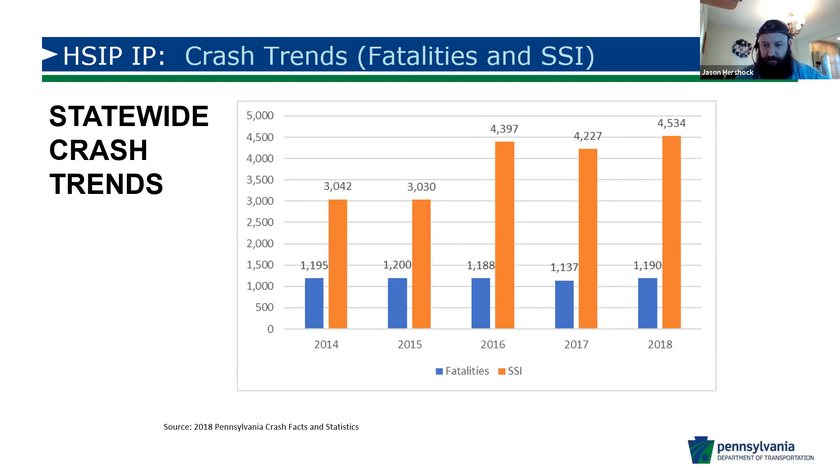Just another way to look at the data here, just looking at it by crash types and the 5-year average of numbers of crashes, you can see lane departures and crashes that are related to lane departures definitely take up a lot of these top locations. Again, looking at the serious injuries, lane departures is at the top, intersections is now number 2.

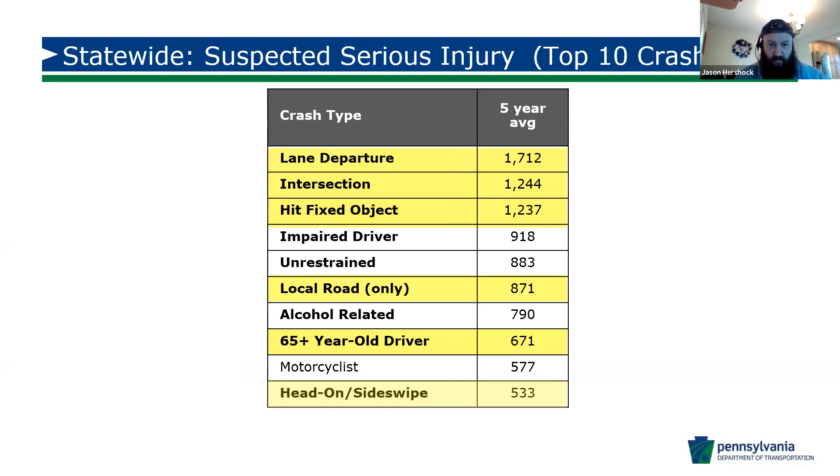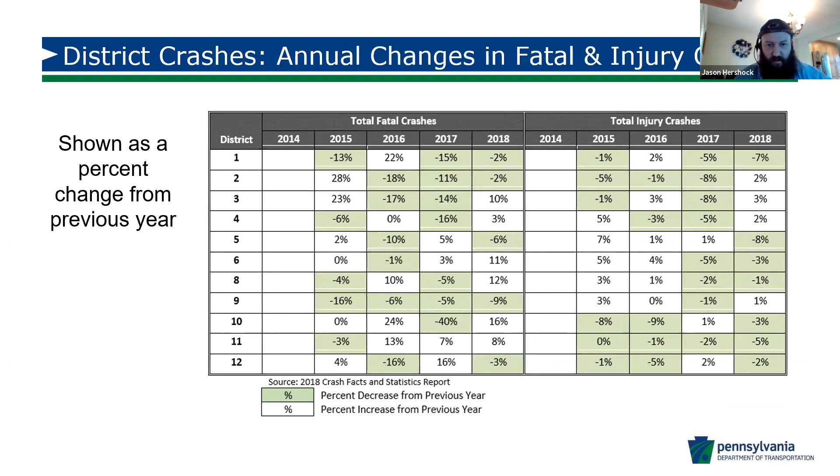Then when we go by districts, you can see this just shows the change in fatalities and total injury crashes year by year that were evaluated. So from 2014 to 2018, 2014 won't have anything because there's no percentage change. That was the first year of this evaluation. So you can see in the green where it's decreased and in the white where it's increased. So sometimes it's going up, sometimes it's going down, but mostly it's going down in most of the locations.

Again, just another slide of that. And then this just shows not the percentage, but the number of crashes that were either reduced from the previous year or the number of crashes that increased from the previous year. Again, the green is the decrease, the white is the increase.

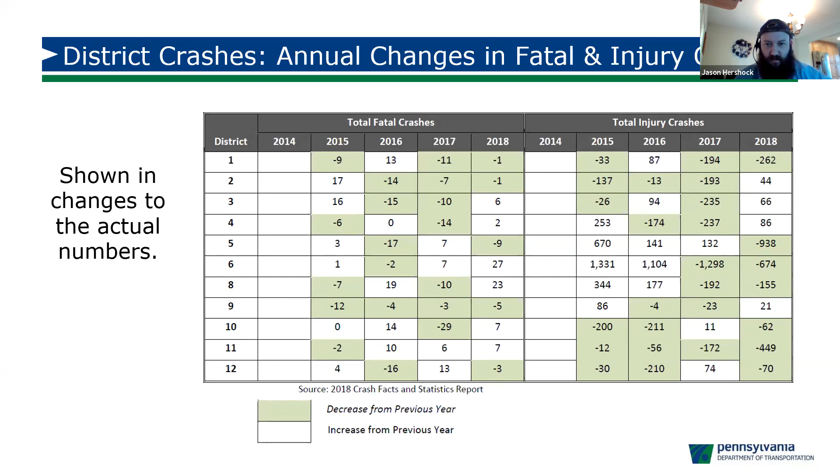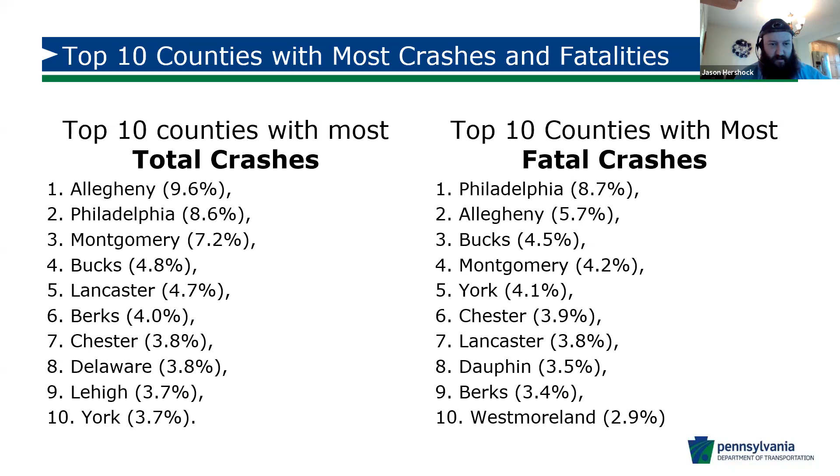And so with that, I'm going to show it by county here. Just by total crashes and total fatalities, you can see these are the counties. If we were just to go by total crashes or fatalities, I don't think anybody's surprised to see Allegheny County and Philadelphia at the top for both of these. And then the surrounding metropolitan areas, surrounding counties of those locations also being in the top. So that's what we would expect to see.

These next few slides, and I'm sorry, that one's a little bit blurry, but it'll sort of show the difference by just looking at crashes versus crash rate and how that can really skew stuff if we're a state that just bases our funding on those. So on the left side, you can see unrestrained annual frequency of fatal and suspected serious injuries. So by that, it's not surprising. We have it in the metropolitan areas, Philadelphia, Pittsburgh area. It looks like up in the Scranton area there too, down into the Harrisburg capital area.

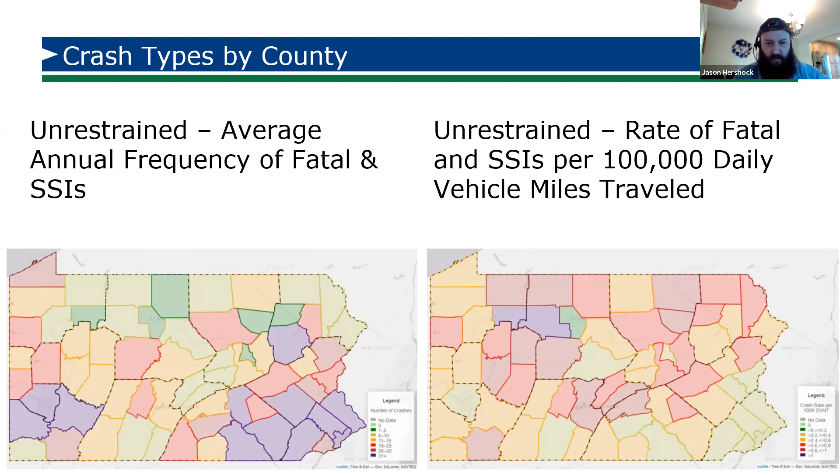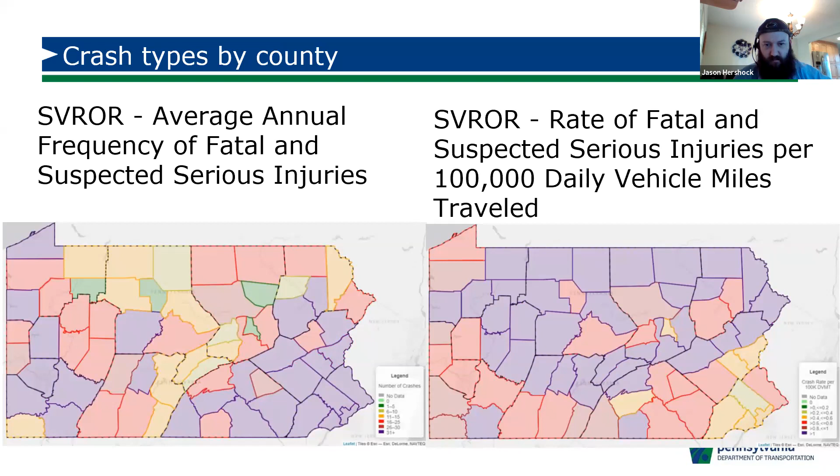But when we put that based on the 100,000 daily vehicle miles traveled, all of a sudden we see that it shifts from the major metropolitan areas to Forest and Elk counties, which are far from major metropolitan areas. So again, the data can be confusing. Which one should we use? And just to show this again, so single vehicle run off the road crashes, which one's more important? Here, the first one on the left shows metropolitan issues. On the right, it shows our rural northern tier and some of the counties in the middle of the state that are mostly rural. So again, which one do we use?

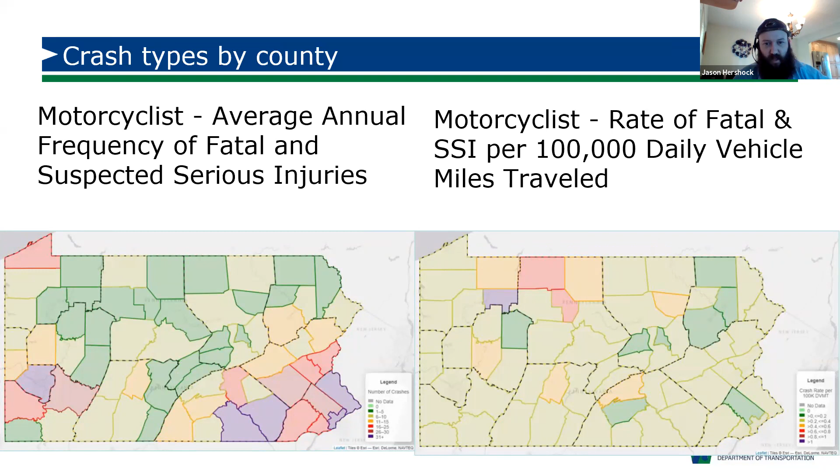Same thing again when we look at motorcyclists. When we look at just crashes, the observed crash frequency, again, metropolitan areas. But when we do it per 100,000 daily vehicle miles traveled, again, we're getting those rural northern tier counties that pop up to the top.

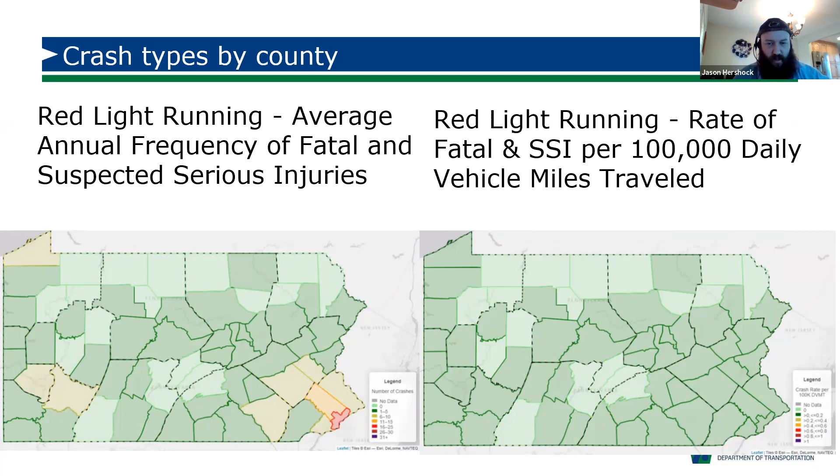And then running red light, this is one, again, I'm just showing this one because I'm going to reference intersection safety later on, but you can see it's mostly green on both of these. There is the Philadelphia area that's red and there's some reddish yellow, but when you look at it per 100,000 daily vehicle miles traveled, really not a big issue there. So just keep that one in mind.

So with seeing some of those crash trends and some of the data there, just want to go over how we spent our money. We have spot improvements where you basically just take an intersection or you take a corridor and you do safety improvements. We have the systemic safety improvements where we apply certain countermeasures to combat different types of crashes through known features of a roadway or other risk factors. Over the 2002 to 2015 timeframe, we implemented 324 projects, costing $406 million. All these were basically on state roadways.

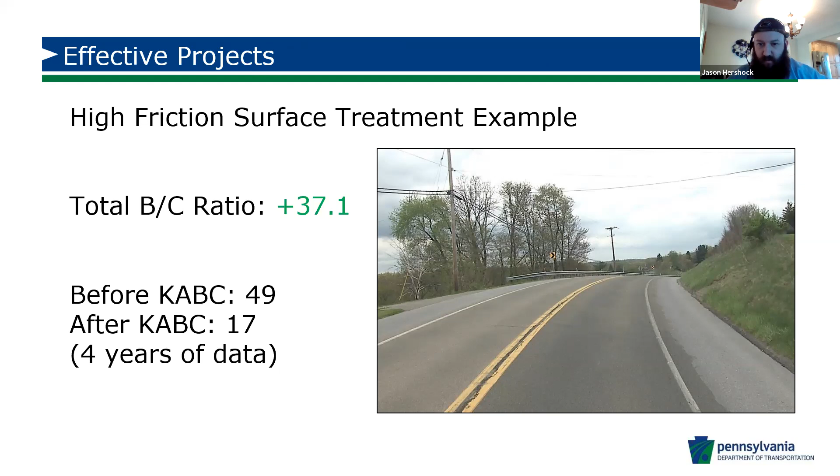So some of the specific locations here, we have an example where centerline rumble strips and edgeline rumble strips were installed. This picture here shows a district-wide safety improvement project. The data on the slide considers the high friction surface treatment portion of the work, and it was enormously successful. Every HFST site had some reduction in crashes and overall severities. The site had an existing history of curve-related and wet road crashes, thus justifying the expenditure.

This was rumble strip and centerline. Oh, I messed that one. Yeah, that previous one was, okay, there we go. This is the rumble strip one. The previous one was the high friction surface treatment. This one included various locations. So this was a systemic application of rumble strips. The BC ratio was very high for this, but there was also a 14% reduction in single vehicle run off the road and 21% reduction in head-on crashes. So you can see 73.8 total benefit cost ratio. We will take that any day.

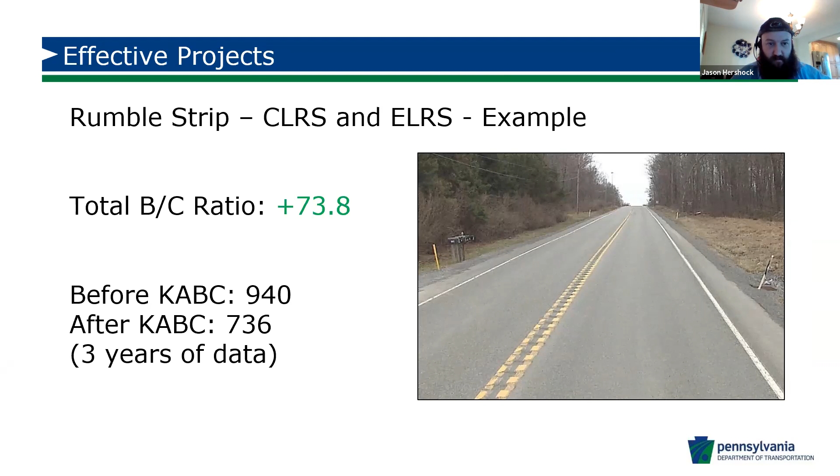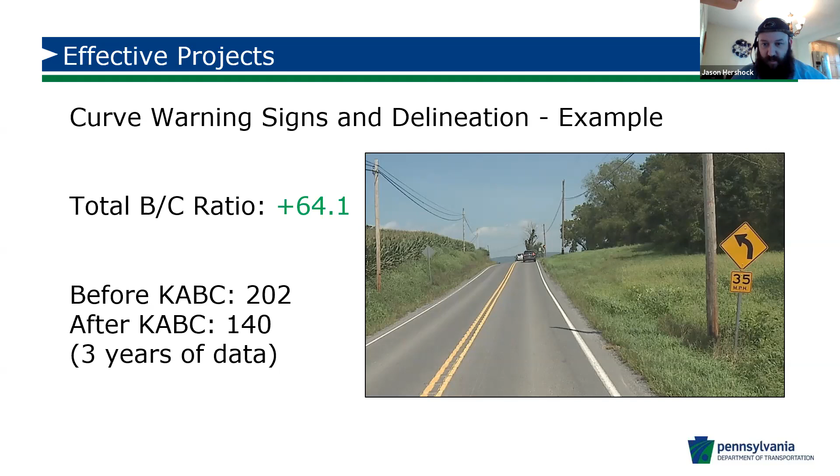This was a curve warning, so basically just identifying curves and doing basic signing and delineation. This was through what we call our roadway departure implementation plan. So again, the slide speaks for itself, very successful. And this was systemically applied at multiple locations.

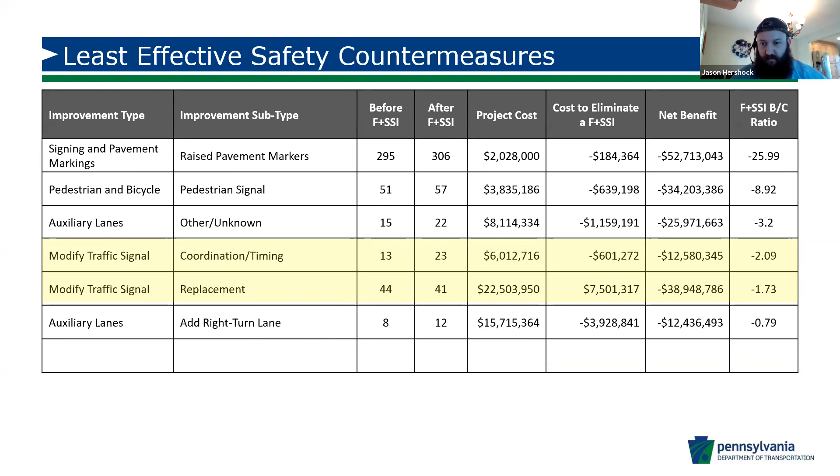So then we know what wasn't effective. Just want to point out, we spent a lot of money on traffic signals and intersection improvements. And when you look at what's the least effective, it was the traffic signal modifications, the coordination, the timing, and the replacements, netting actually negative cost benefit results. And so we definitely have done some studies after that to see what could be the cause of that.

So quickly, you can see some of these here. This is a district-wide raised pavement marker, the RPMs, not very successful at all. It was performing poorly. The extreme benefit cost ratio was due mostly to the small project and about 8 additional fatalities that occurred after this project was done.

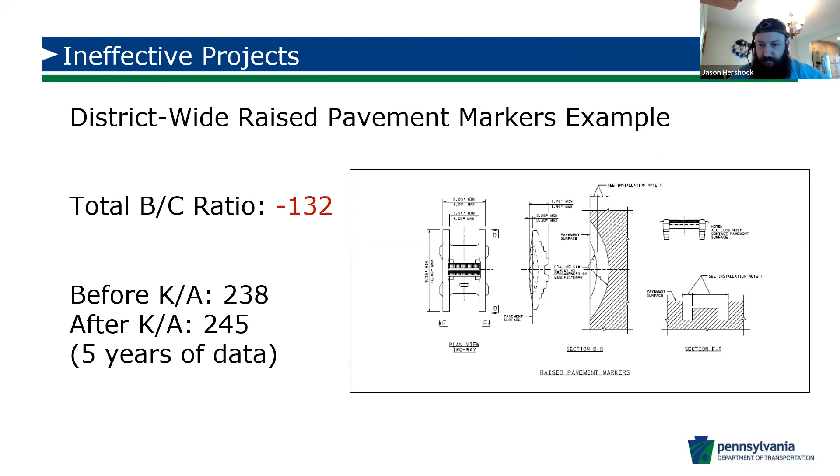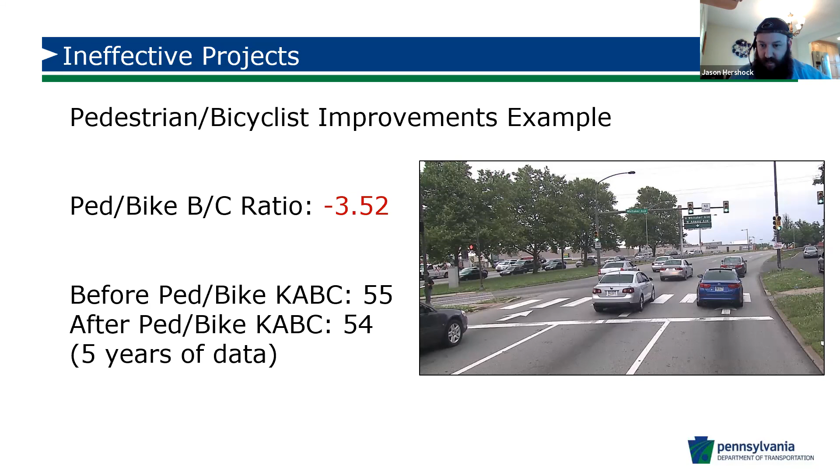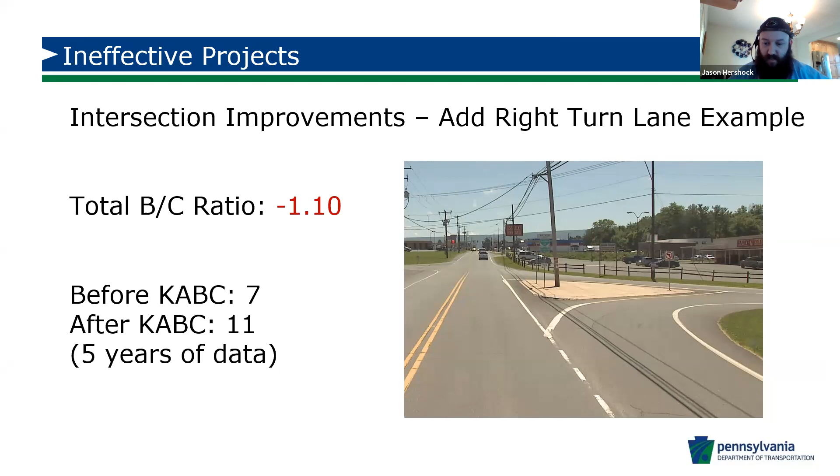In addition, while the project corridor had over 3 crashes per year, there was less than 1 intersection crash per year. So this is where that data driven comes in. Should this have even been an HSIP funded project? Probably not. Noteworthy practices, and I'll go through these pretty quickly.

Pennsylvania's already implemented many different options here, and I'll cover them individually. So HSM implementation. PennDOT continues to strive to be a leader in implementing the Highway Safety Manual. PennDOT now requires the Highway Safety Manual used in analysis for alternatives and requested for design exceptions. Provided multiple rounds of Highway Safety Manual training to headquarters and districts. PennDOT's made extensive efforts to fully localize Highway Safety Manual tools. So we have our own SPFs and everything, and we've made tools to make it as easy to use as possible.

Data analysis. We started our first network screening in 2017. We're currently in our next round of network screening, which will include a lot more factors in it. It covers all 67 counties with hundreds of locations in most of the counties. And we also have standardized the way HSIP applications come in through a SharePoint website.

Innovative countermeasures, you can see on the previous slides what works. Obviously, we've done a lot of high friction surface treatment, signing, rumble strips, basic intersection improvements. You could see the back plates, the enlarging of the lenses. Those things work, as well as some standards changing, such as safety edge.

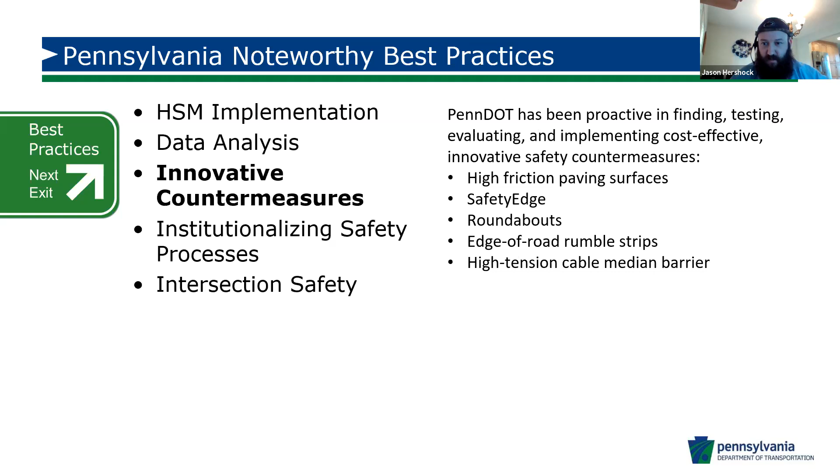We've institutionalized different safety processes by updating our Publication 638. That basically involved a big rewrite that happened over about a 3-year period, but that's been done. And many of those things are now finding their way into other manuals, as mentioned before, and resulting in pretty good positive safety benefit.

And then intersection safety was also another one. PennDOT's implemented many intersection safety countermeasures at thousands of intersections, ranging from bracketed stop signs with advanced warnings to converting intersections to roundabouts. And also, we mentioned the ICE policy, and Mark, who's going to speak after me, has extensive knowledge of many states who have implemented ICE policies and have reaped the rewards of those.

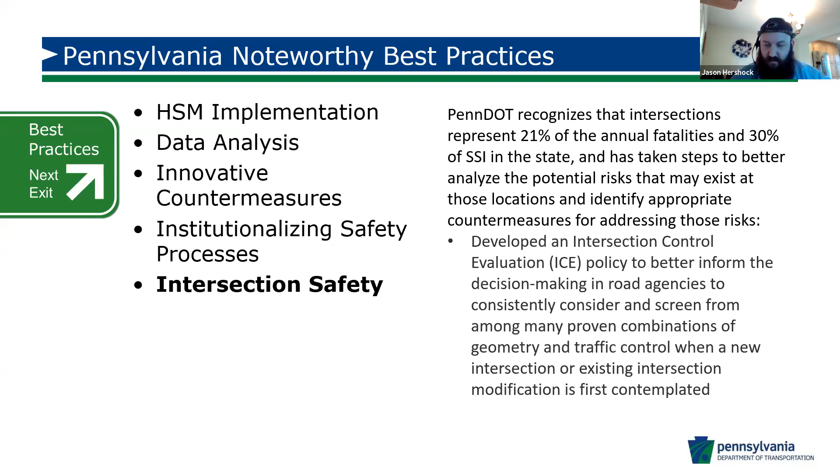So in the end, we encourage that the districts, the planning partners, local municipalities, everybody participating in this, the consultant world, Federal Highway Administration, prioritize highway safety and involve each other more often in the HSIP process.

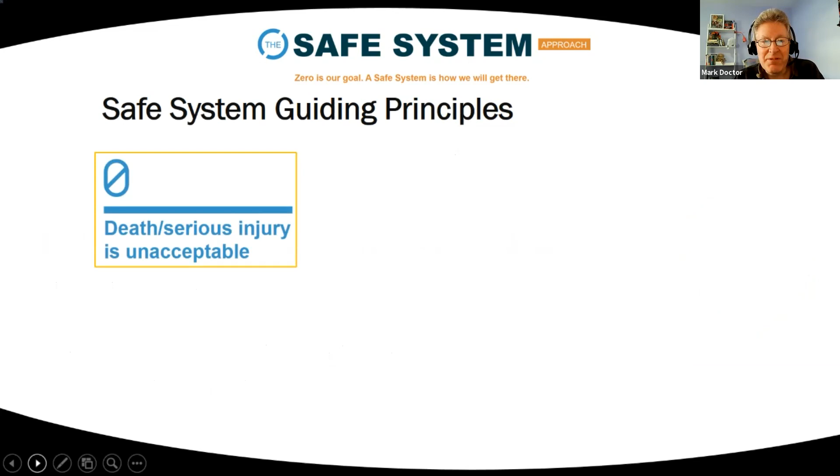So probably the best way to define or describe the safe system approach is to go through the 6 principles of the approach. And it starts with a principle that death and serious injuries are unacceptable. And also the related principle that human beings are inevitably going to make mistakes. And on the road, those mistakes can lead to crashes. And when those crashes result, the key is to keep them survivable. And so that ties in with the notion of humans being vulnerable, but also having a tolerance to certain crash forces before harm occurs.

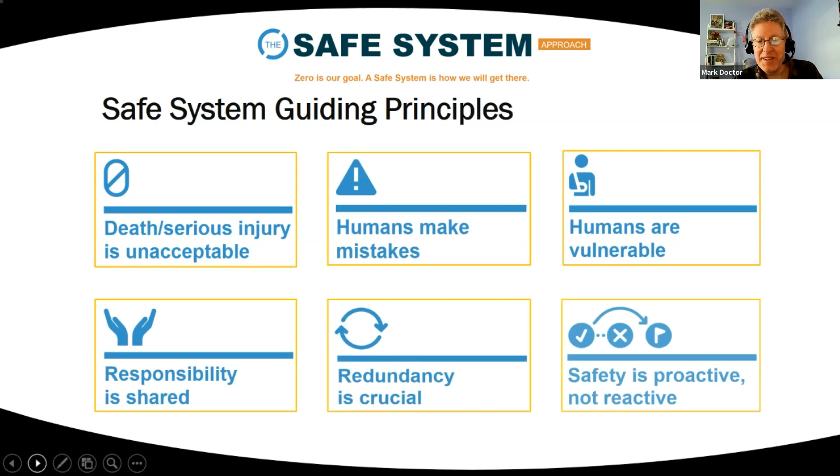The safe system approach is about partnerships and sharing responsibility within the system and building redundancy within the system. And then lastly, being proactive rather than reactive. So the first principle that death and serious injury is unacceptable, I hope everyone can agree with that. It's very consistent with so many of our Vision Zero goals and objectives.

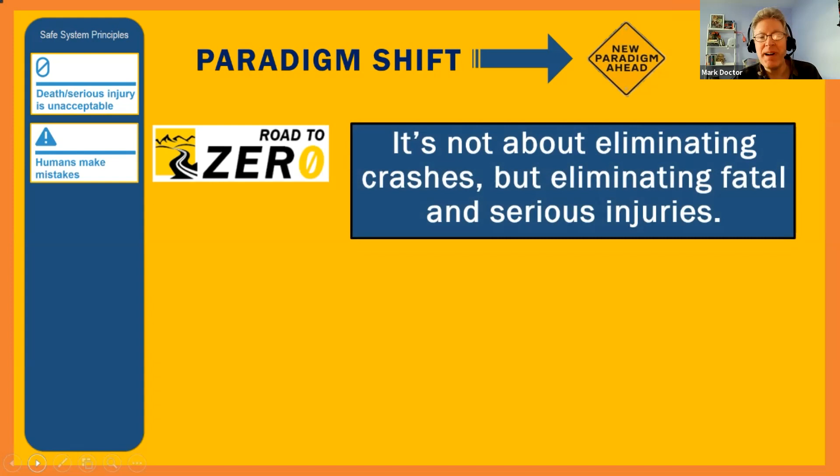But how do we reconcile that with the inevitable fact that human beings will always make mistakes? We will always have mistakes out there, and those mistakes will lead to crashes. Well, this is where I think the first paradigm shift comes into play. When we talk about zero, it's not about zero crashes, it's about zero deaths and serious injuries. That's a big difference. It's not about eliminating crashes, it's about eliminating fatal and serious injuries.

So, what is it that separates a crash from being a fatal or a serious injury crash versus one that is minor injury or, better yet, property damage only? Now, this is where the third principle that humans are vulnerable to certain crash forces then kicks in. And another paradigm shift kicks in. When we talk about designing and operating safer roads, that basically becomes an exercise in managing kinetic energy.

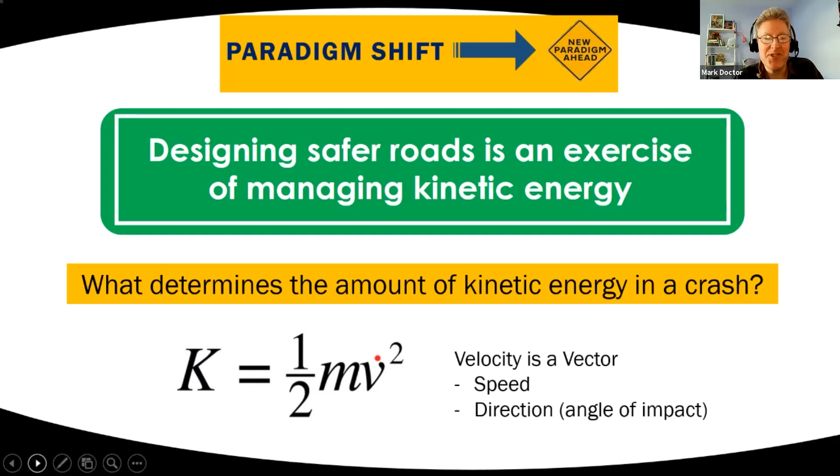But also notice that velocity is squared. It's exponential. And what that means is the increase in transferred kinetic energy in a collision goes up exponentially as the speeds go up. And also it is related to the rate at which we are able to wipe off our speed during the braking maneuver. We wipe off most of our speed during the last moments or the last distance of the braking process. That's a real key component.

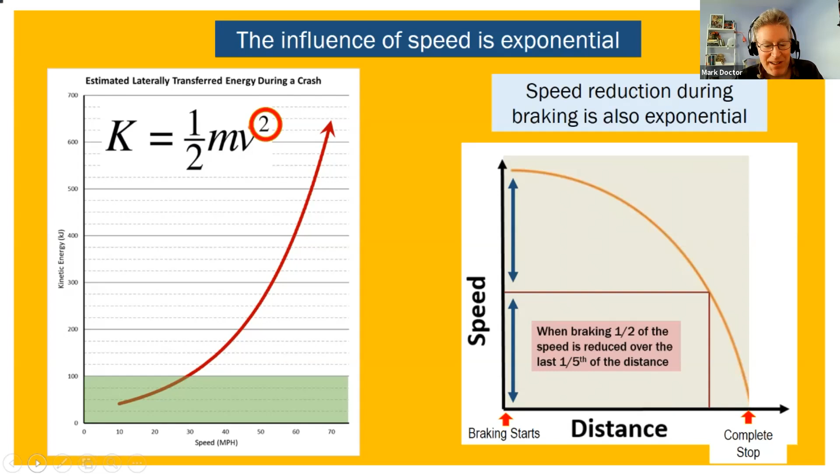And it's hard to educate the public on this, and not everyone has that knowledge of physics. But it is possible. It is important, and I'd like to play for you a video here. This is a public service announcement video that was created in Australia, and it was part of their Wipe Off 5 campaign. And when they say 5 kilometers per hour, so the campaign is basically trying to get people to drive at 60 kilometers per hour instead of 65. Well, that's about 37 miles per hour as opposed to 40 miles per hour. So more in the urban context.

But just imagine the safety benefits if we could get US drivers just to slow down by 5 miles an hour. But here the campaign was for 5 kilometers per hour. So I want to play this short video clip from Australia. And again, the 60 and 65 that they reference are kilometers per hour. But I think this does a great job of trying to put it into common sense terms for the public to understand. So let me play this video here. Hopefully this will kick in well.

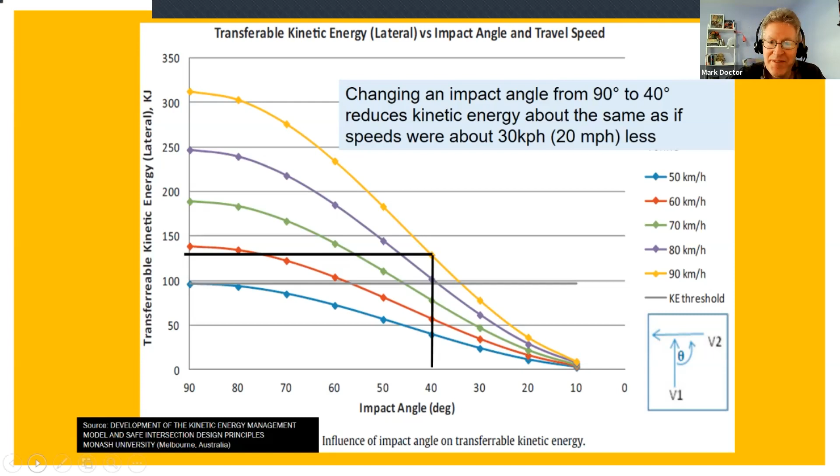And I'd like to use roundabouts as a great illustration of this point. First of all, roundabouts hopefully slow vehicles down. The approach alignment, the curvature, the splitter island, the deflection that we have, hopefully lowers speeds. We know that roundabouts, compared to basic intersections, have fewer conflict points overall.

But even if, let's take the worst case scenario where someone doesn't slow down and someone totally violates the traffic control device. They blow right through the yield sign and they collide with another vehicle in the circulatory roadway of the roundabout. Well, the geometrics of the roundabout would be such that that collision would probably be somewhere between 40 to 50 degrees as opposed to a 90-degree T-bone type of crash. So I think a roundabout illustrates all of those points quite nicely and aligns with that principle of the safe system approach to basically manage kinetic energy, even if people make mistakes and even if they intentionally or unintentionally violate a traffic control device.

So the safe system approach, this is probably the best definition that I have seen out there. It does come from an Australian publication, and it describes the safe system as managing the road such that impact energy on the human body is firstly avoided, or secondly, managed at tolerable levels. And we do that by manipulating the speed, the mass, and the crash angles of crashes that occur to change the severity or to change the outcome.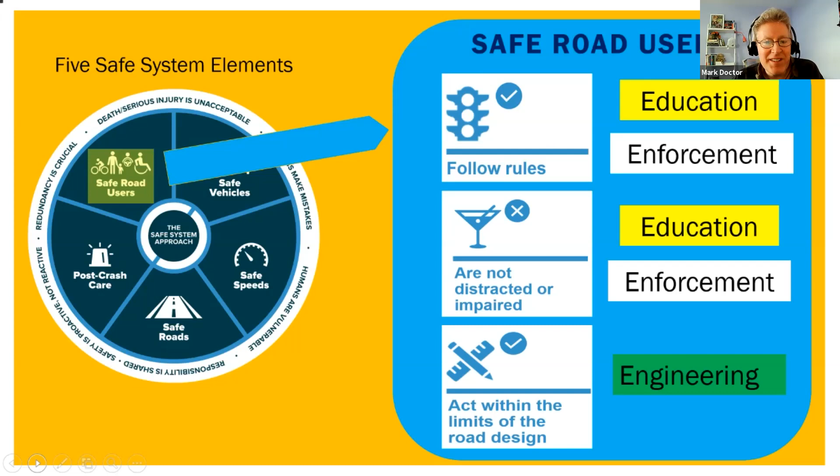And it does begin with safe road users. Now, we certainly hope that users follow the rules, obey the traffic control devices, and that's where education and enforcement can certainly play a role. We hope that users are not distracted or impaired. And again, education and enforcement come into play here. But also, as engineers, there's a component where we design and operate the roads with a consideration for human factors in designing our system so that they're within the tolerance levels of what humans can handle.

Then safe vehicles. And there's been a lot of great advancements in vehicle safety technologies. And vehicle safety technologies can be split up into the category of those that help us avoid collisions in the first place, maybe something like lane departure warning systems, and then systems that make crashes survivable. So things like airbags or crumple zones in the vehicle. And with the emerging technologies like connected and automated vehicle technologies, who knows what the future can hold? It's really quite impressive what is possible with safer vehicles.

And then safe speeds. And this is where education, enforcement, and engineering, I think, converge all together. And under the safe system approach, we know that there are certain roads that can be engineered to accommodate higher speeds. If you think about perhaps a rural freeway, maybe an interstate, and maybe we put ourselves in a very flat area.

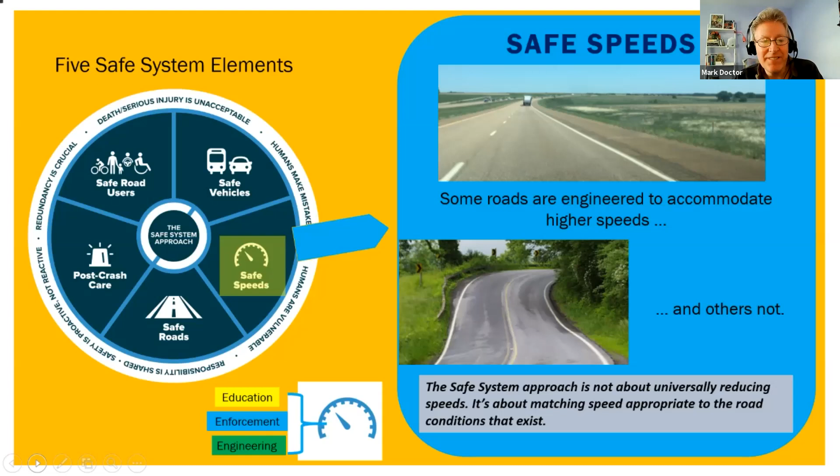And that's a key principle, and also one that is important to convey to the public in understanding this idea that not all roads are created equal or are designed to equal levels of safety. And then safe roads, this is where as engineers we really come into play. Safe roads can be designed and operated to firstly avoid crashes, and then secondly manage the kinetic energy, or what is transferred to the human body if collisions occur.

So avoiding crashes in the first place, that sounds good, right? Well, how can we do that? There are some strategies, especially when speeds are inconsistent. We can try to separate different users in space. This would be things like providing sidewalks for pedestrians or separated bicycle paths for cyclists. Things like protected intersections may fall into this category.

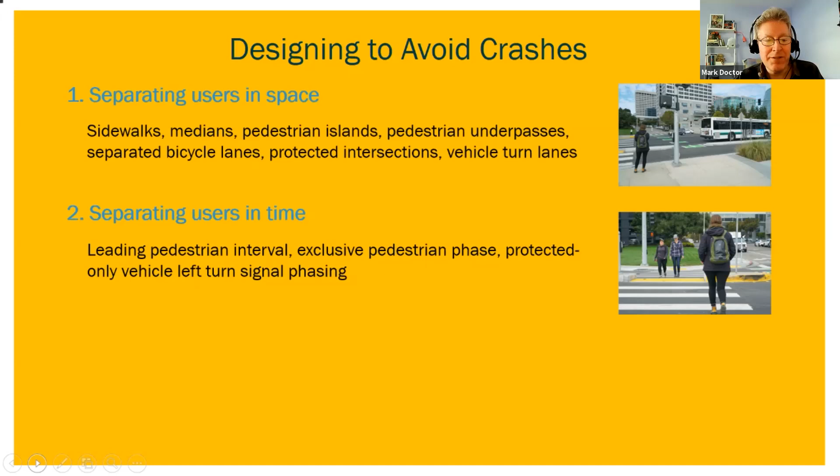If we can't separate users in space, can we separate them in time? Perhaps a pedestrian phase at a signalized intersection, or a leading pedestrian interval, or sometimes just separating conflicting vehicular movements, like maybe protected only left turn phasing at a signalized intersection. Those are examples of separating users in time.

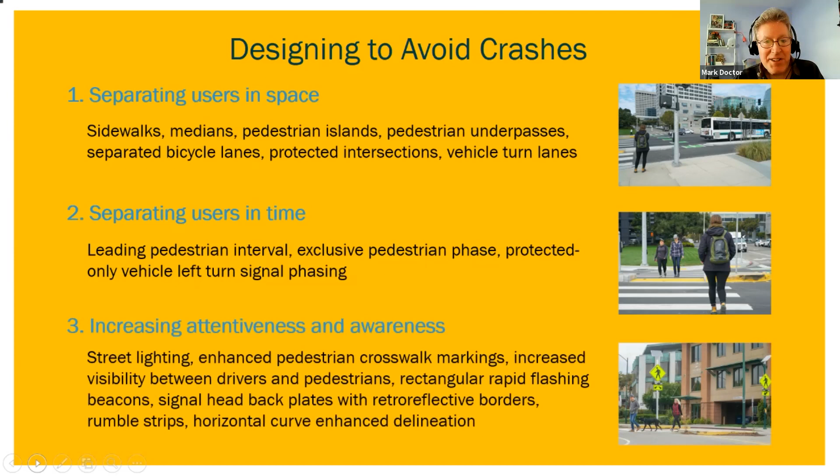And then lastly, trying to increase the awareness or attentiveness of the various user groups. This can be anything from street lighting to pedestrian enhancements like the rectangular rapid flashing beacon. So all examples of how we try to avoid crashes in the first place. And then when crashes do occur, keeping them survivable by managing speed, managing impact angle, having crash-worthy devices on the roadside, all to manage the kinetic energy transfer.

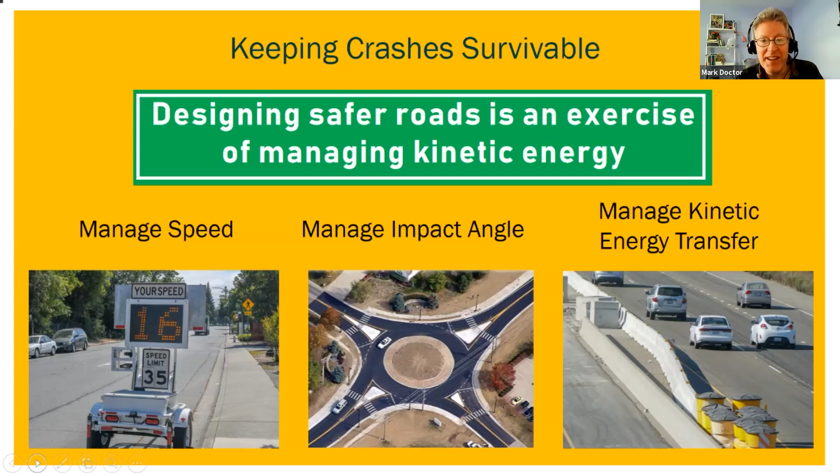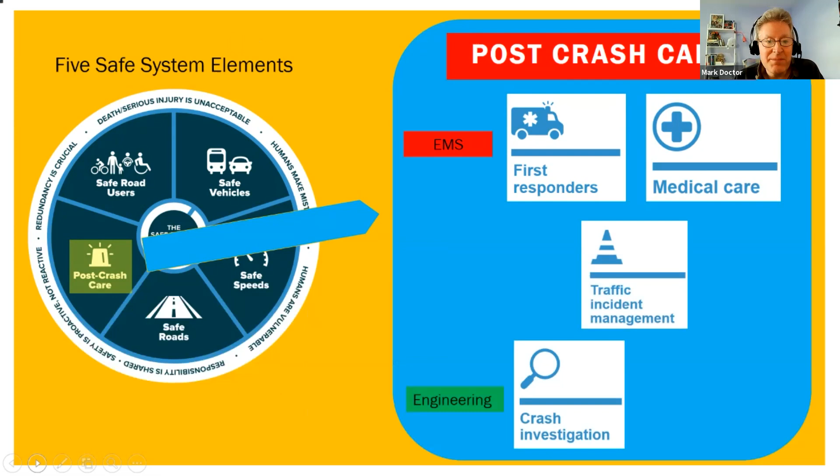And then the last element is post-crash care. This is where emergency medical response comes into play, but also traffic incident management plays a key role in post-crash care, as does the engineering component of going back and investigating crash sites to see if there are any countermeasures that are appropriate to be implemented there. So those are the 5 elements of the safe system approach, and really make up the partnerships. Engineering alone cannot achieve a safe system. It really has to be all 5 elements working together.

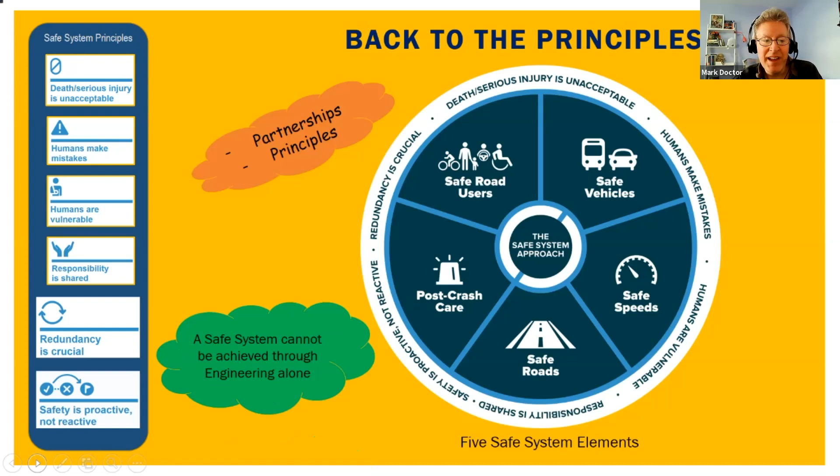And that's where the last principles of having redundancy within the system and being proactive rather than reactive come into play. The idea of redundancy, I think, is described well through what many people would call the Swiss cheese model. If you think of slices of Swiss cheese, they have holes in them, right? Well, think of each of the 5 elements of the safe system as represented by 5 slices of Swiss cheese. And let's say 5 separate slices, so not one chunk that was just sliced into 5 pieces, but 5 random slices of Swiss cheese.

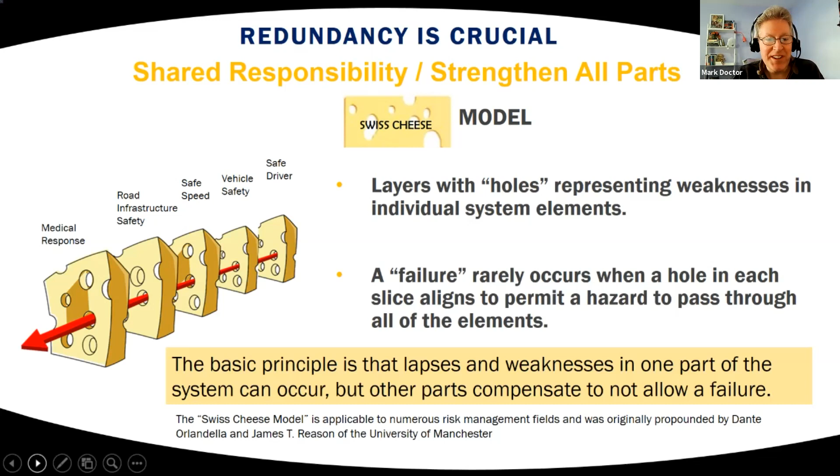And the holes in the cheese represent the weaknesses in each of the elements. We know there are weaknesses in each element, but if we can strengthen each element, that can be represented by reducing the size of the hole. And also, when you put the 5 slices together, it'd be rare where the holes line up. That would basically be representing a failure, and a failure would be when we have a fatal or serious injury collision. So strengthening all the elements and having that redundancy is a key part of it.

So it starts with safe road users. If everyone operated perfectly, if human beings never made mistakes, we probably wouldn't be here today talking about road safety. But we know that isn't true. We know there are holes in that slice of cheese for sure. Well, if a human makes a mistake, maybe the safe vehicle can take over, maybe a lane departure warning, or if a crash does occur, the vehicle safety technologies.

But we know that safe vehicles aren't fail-proof. And so the next element is safe speeds, so that if a collision does occur, maybe that collision can at least be survivable if the speeds were low enough. But we know that that's not always the case. There are weaknesses in that element.

Safe roads. And if we try to design our roadways to be forgiving, so that, well, in the first place, try to avoid the crash, things like rumble strips, perhaps. And Jason talked about the great cost effectiveness of rumble strips, but having a clear zone to make the crash survivable, all of that is part of the safe roads element.

And then the last component, kind of like the last safety net in the safe system, is post-crash care, getting timely and effective emergency response. We know that that golden hour can make all the difference between life and death. And in rural areas, that can certainly be a challenge. Of all the safety issues we have in rural areas, the post-crash care response time is another big factor.

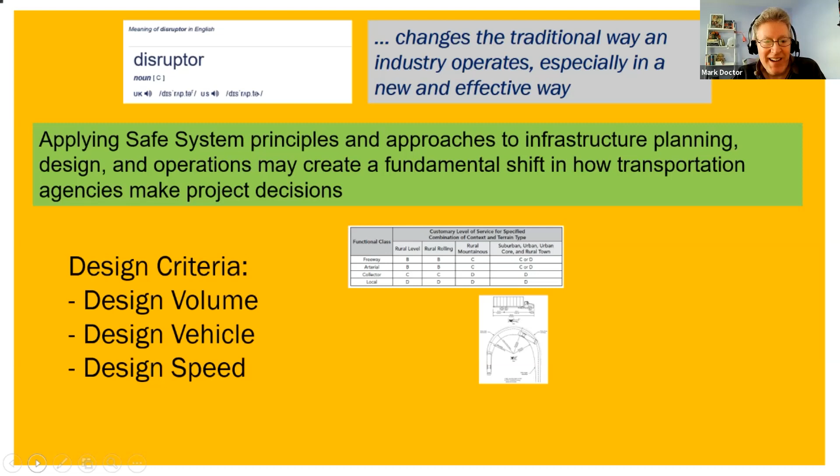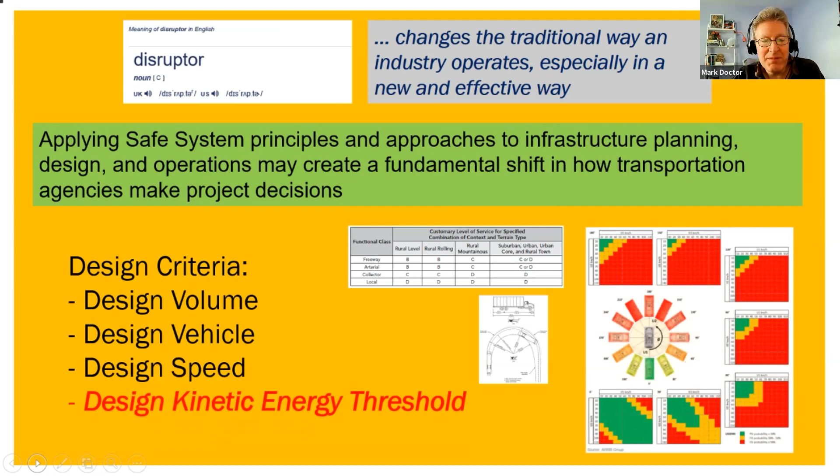If you think about how we design a road, we often gravitate toward things like a design volume or a design vehicle or the design speed. Well, what if we had a design kinetic energy threshold above which we try to keep the forces of crashes below the point at which harm occurs to the human being. Well, we are getting there, and other countries have had success adopting kinetic energy management models.

And so, as a starting point, the Federal Highway Administration is soon going to be releasing our Safe System for Intersections framework and methodology. And it's a first step. It's a first cut at trying to consider the safe system principles and also the kinetic energy principles.

And look for this to be coming out early next year, early in 2021. We will have a publication, also a series of webinars to basically describe this framework. And Jason also mentioned the intersection control evaluation process, or ICE. And Pennsylvania, of course, is one of the leaders in the ICE policy and process.

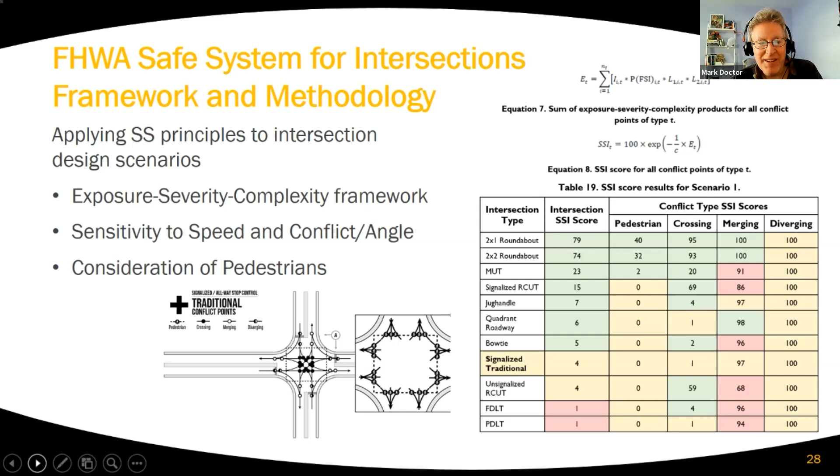Well, think of the safe system methodology as a potential additional aspect or consideration that agencies could look at and utilize when they go through, say, an ICE type of evaluation and look at what is the more appropriate intersection control and design form. And so applying the safe system principles to help make those decisions, especially among all of the various intersection forms that we have. So that's an exciting new product that should be coming out in early 2021.